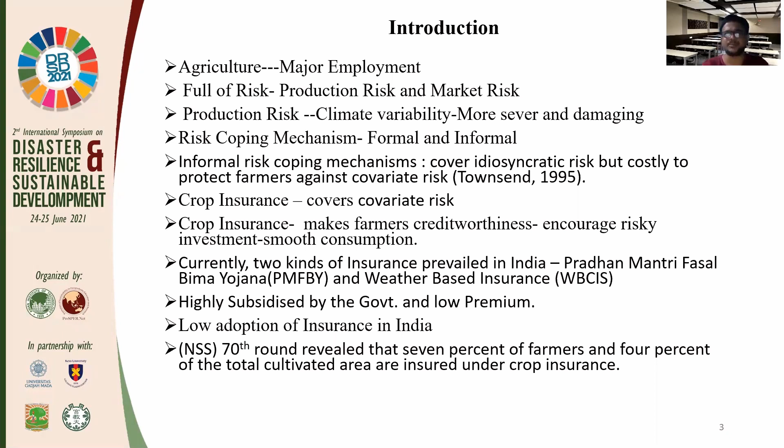Over the decades, a large body of literature explained and inquired about the low adoption of crop insurance. They found different socio-economic, demographic, educational, and structural factors responsible for low adoption. However, these studies lack behavioral anomalies or behavioral economics literature or behavioral biases that influence crop insurance adoption.

So the objective of my research paper is to understand the studies conducted so far in India which inquire about determinants. The second objective of my study is to derive insight from behavioral economics literature on crop insurance adoption for future research in India.

So there are two groups of literature I explored. The first group explained the determinants of crop insurance. The second group explained the behavioral anomaly that could influence farmers' behavior to adopt crop insurance.

The determinants are categorically divided into four groups: economic factor, socio-demographic factor, educational factor, and structural factors. In economic factor, price or premium of the insurance is important. Many studies in India found that price and premium of crop insurance is negatively related. Similarly, liquidity constraint is also a very important factor for adoption; lack of money or liquidity also hinders crop insurance adoption.

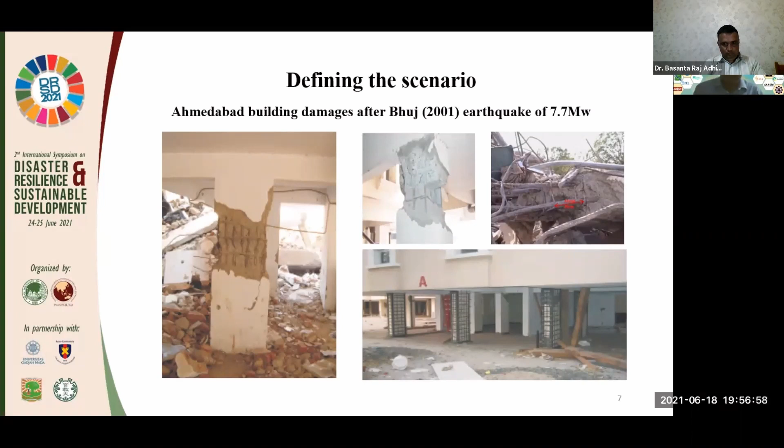Building details: 20-meter length, 16-meter width, 45-meter height, time period 0.9 second in x direction, 1 second in y direction. Story height is 3 meters, soil type is medium, and we have designed as per the 3 codes.

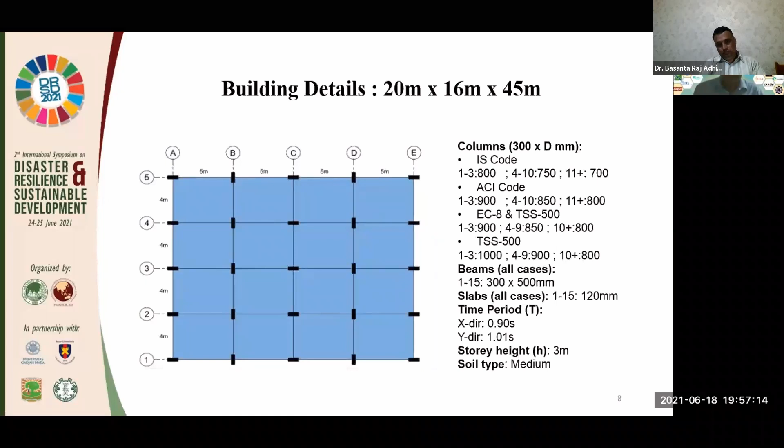The performance evaluation as per the pushover analysis, which is a non-linear procedure. The strength of the building as per IS code is the highest, and the ductility of the building as per the other codes is highest.

Hence we should choose a result in which ductility and strength are both achievable. The performance of the building design as per IS code satisfied the life safety and collapse prevention performance criteria under 3 ranges of the hazard, whereas the life safety performance is not satisfied for the other codes. We need to work more on that.

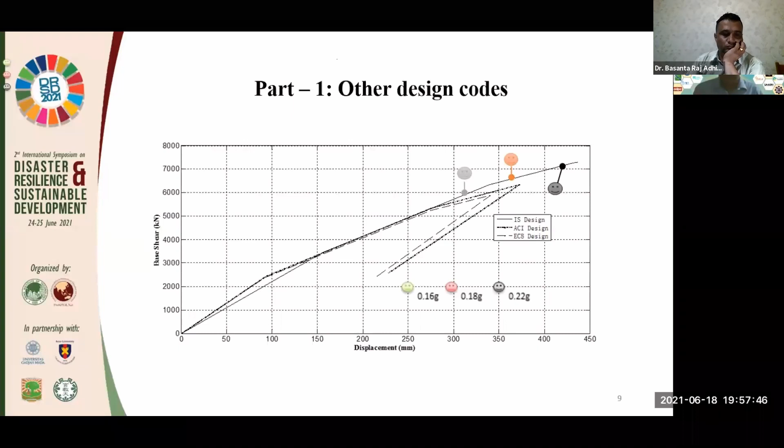When we see the performance of a column at the base level, the strength is high as per IS code, represented by the moment curvature graph, and the ductility is higher for other codes. The percentage of steel varies by 2 times the amount between IS code and other codes, whereas the location of hinges in IS design building is on the upper story. The hinges are seen in the lower story for the other 2 codes.

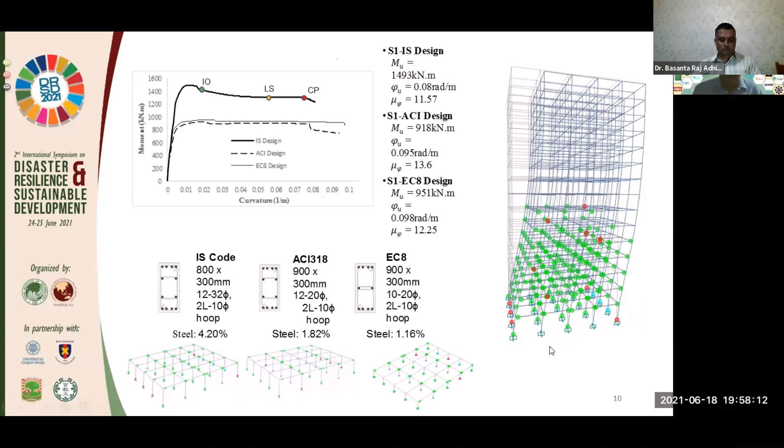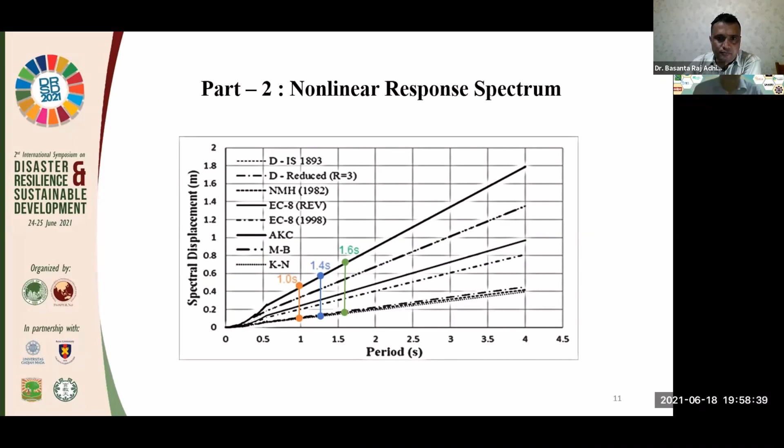That should be followed. The second phase we have evaluated is nonlinear response spectrum. From the graph, we are able to obtain the nonlinear displacement demands for 1 second, 1.4 second, and 1.6 second periods. The displacement demands are obtained for the building. This is important because Ahmedabad city is located at a far distance, and displacement based estimates will govern the serviceability criteria and also the strength criteria, because it is a displacement sensitive region.

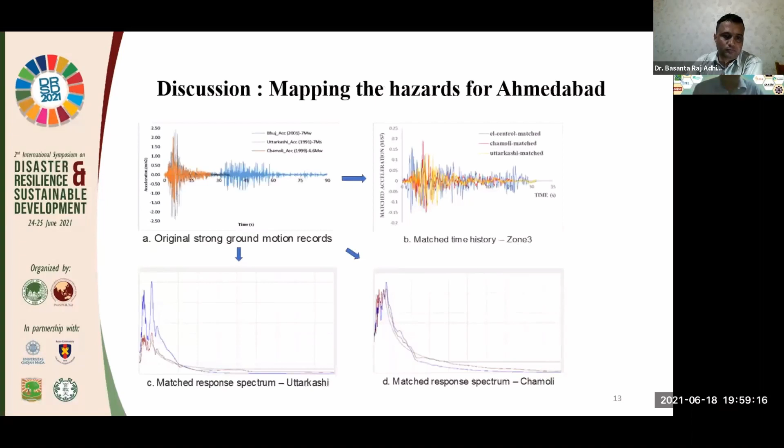Using the feature of ETABS, from the original time history we can obtain a matched time history for our region, or we can get a matched response spectrum. We should use this feature and get more results from this, which will help design high-rise structures in Ahmedabad city.

The pushover analysis procedure showed good results for the building, and the minimum width criteria prescribed by code 13920 is helpful, as the shear capacity and performance of the column gets increased in both directions.

The direct integration method gives a good estimate of the problem. We need a mathematical model and a good dissipation energy model, and these are the two weaknesses in the nonlinear time history analysis, so we should be careful in using them.

The DDBD procedure gave a negative impression of the capacity of the building, as the ductility achieved was only 3, while the assumed value was 5.

From this graph, we can say the IS code is better in terms of the life safety performance criteria and the collapse prevention performance criteria. None of the codes were able to justify the reoccupancy criteria, which is highlighted in the gray area where further research is required.

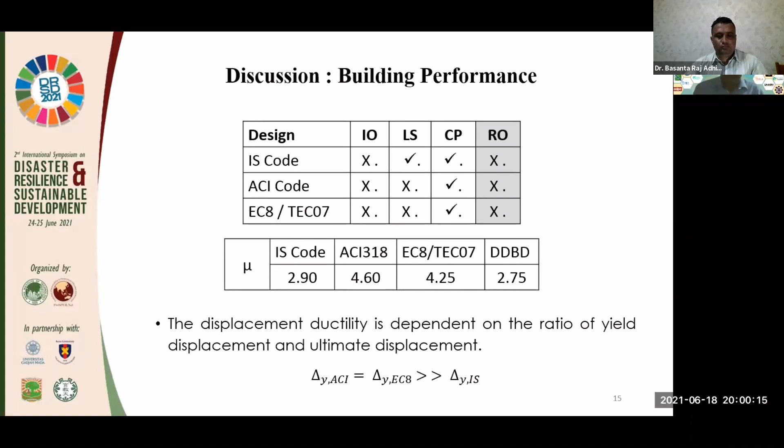The displacement ductility of the IS code is very low compared to other codes and needs to be improved. Finally, the interstory drift we evaluated using a MATLAB program is beneficial to identify the time histories for resilience-based performance-based design, and we can use them for various displacement limits for serviceability and ultimate conditions. That should be the next step for Ahmedabad city.

The current generation of seismic analysis and design must include the locality index, because it represents vulnerability to a larger extent, and building bylaws should govern this. The most stringent rules shall be framed for an earthquake range of 4 to 8 magnitude, and the scenario has to be as per the locality.

So for the Gujarat level and for the India level, this is very important, and we suggest improving the building bylaws, as we need to evaluate the locality indices. Thank you.

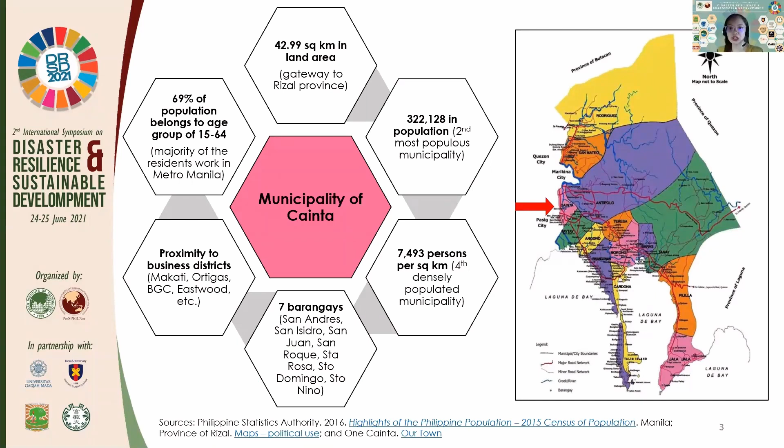Cainta is a first-class municipality of the province of Rizal. As of the 2015 census, it has a population of over 322,000, making it the fourth most densely populated municipality in the country. Cainta has been experiencing rapid growth and development in past years, largely due to its strategic proximity to Metro Manila, the capital of the Philippines.

The study tried to answer the question: is Facebook a viable source of disaster risk information at the local level? The project's main objectives are to study how risk communication is conducted by the LGU of Cainta through Facebook, to determine whether Facebook plays a role in the LGU's risk communication, and to confirm whether usage of Facebook resulted in increased levels of awareness and participation.

The theoretical framework adopted for this study is the NDRRMF. As enshrined in the framework, communities are at the heart of DRRM. It entails going into the grassroots and really interacting and engaging with the community.

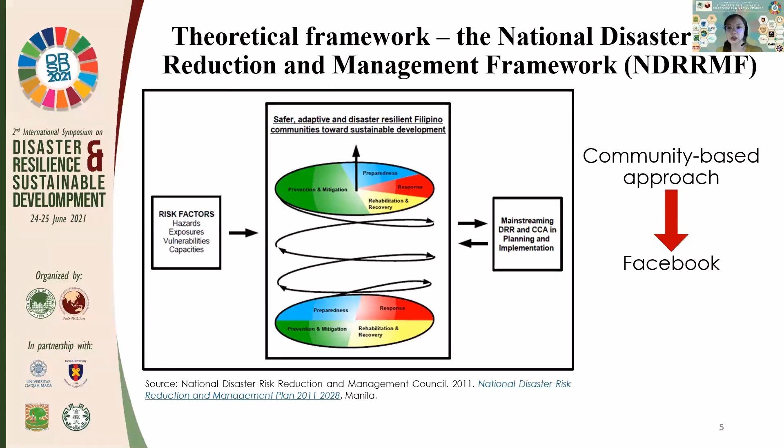This is where Facebook as a tool comes in, enabling a more accessible approach to communication and a two-way dialogue between the LGU and the community, with the capacity to be done in real time.

Based on the community resilience framework of Macaslan, two common denominators can be identified: good governance and an engaged community. The government creates the enabling atmosphere where a community feels empowered to engage.

As an enabling tool, technology such as social media can further foster community engagement by reaching wider networks than traditional media. There are two parts to disaster risk communication: the conveying of timely science-based disaster information to educate and update community members, and community members providing critical disaster-related information from the ground to influence disaster response.

The two parts to this disaster risk communication is what makes it an important aspect of DRRM before, during, and after crisis. The methodology of the study included KII, municipal-wide survey, and desk review.

The LGU of Cainta utilizes Facebook in their risk communication strategy through the mayor's personal account, the One Cainta Facebook page, and the Cainta DRRMO Facebook page.

As of 22 April, the One Cainta Facebook page has over 110,000 followers and over 105,000 likers. The page is the official Facebook page of Cainta and is being managed by the Public Information Officer.

The mayor's personal Facebook account has over 368,000 followers, while the number of friends is not accessible to the public. The Cainta DRRMO has around 4,000 friends, while followers are not indicated on the page.

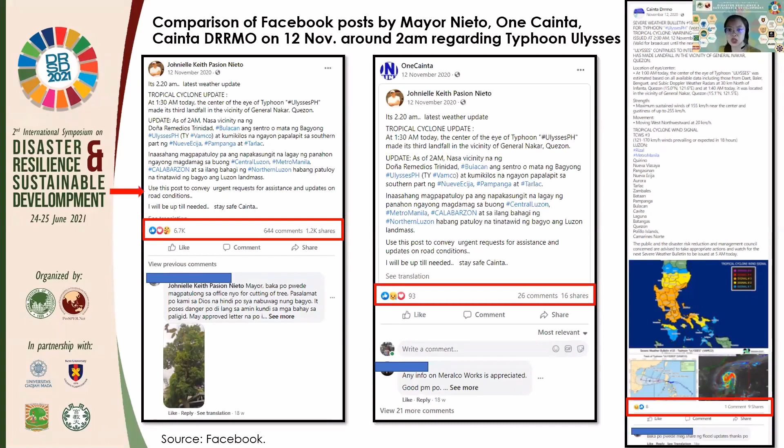Except for the use of graphics, the mayor posted an original post about the typhoon, used Filipino language in the post, explicitly asked people to use the thread for urgent requests for assistance, and out of all three accounts was the only one replying to the comments in the thread.

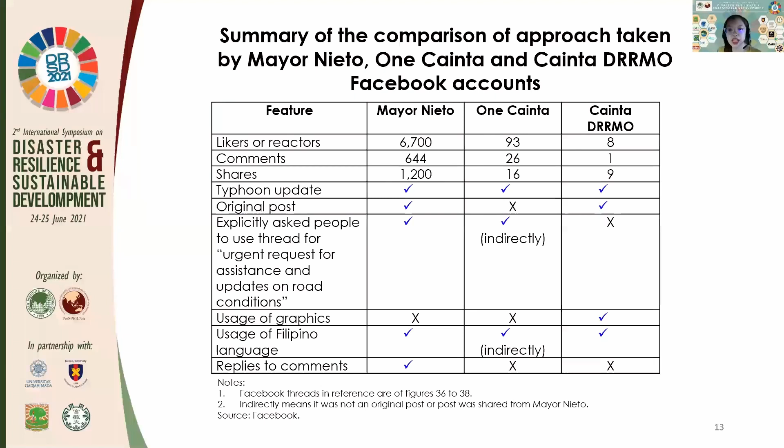This is really the key feature identified and likely the biggest contributor why the post garnered much more likes or reactions, comments, and shares from his followers.

97% of the survey respondents said that Facebook made disaster-related news and information easier within Cainta. Of the respondents who answered no, they cited that there were too many Facebook channels, a lot of mis- and disinformation, they experienced slow response, and poor signal was a problem.

Although 97% agreed for the mayor or the LGU to continue engaging the public in DRRM through Facebook, respondents identified the following improvements: creating information that's complete and easy to understand, posting less informal topics and concentrating on news dissemination, ensuring prompt responses and real-time updates, creating and centralizing one official Facebook page, boosting internet speed, and exploring other platforms.

The community members have used Facebook not just to await news and information, but have been very proactive in seeking disaster-related news and information, such as status of flooded areas and roads, as well as deciding for or against evacuations in the case of Typhoon Ulysses. The study clearly demonstrates the crucial role of Facebook

before, during, and after disaster events, which is aligned to the 4 thematic areas of the NDRRM plan. With more and more people relying on receiving disaster-related news and information through Facebook, coupled with the proactiveness of the LGU in utilizing the platform, it is without a doubt that this has contributed to an increase in the resilience of the residents of Cainta.

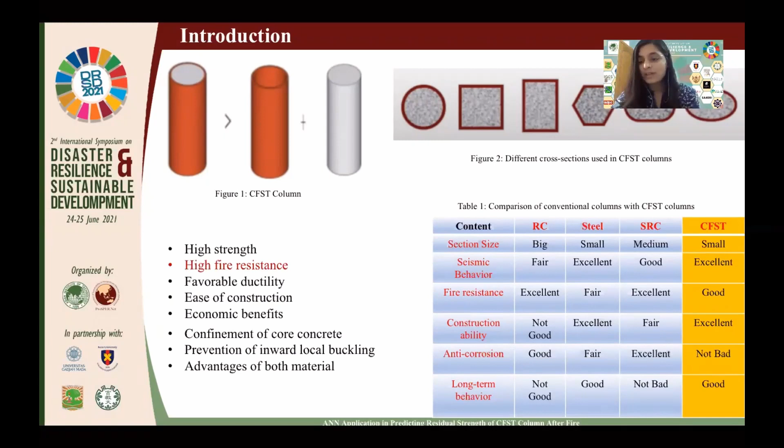So for any construction, it is very important to design it for fire resistance. But if in any case a casualty occurs, then it is very important to know the residual strength of the structure so that retrofitting can easily happen. So this is the main objective of the research: to predict the residual strength of CFST columns after the effect of fire using machine learning tools.

So we have used a machine learning approach to predict the strength here. Artificial neural network tool is used in MATLAB to get the residual values. Here we have used ANN, and it works like the brain's neural learning, for computer-based artificial intelligence.

Because experimental data sets are used, this tool predicts more realistic data for any prediction. ANN also has the ability to overcome the shortcomings of empirical models. And finally, it will be a huge benefit for structural engineers to retrofit damaged buildings.

There are so many fields in structure where AI is used, like structural dynamics, damage assessment, fatigue crack growth, concrete compressive strength prediction, structural analysis, and their design.

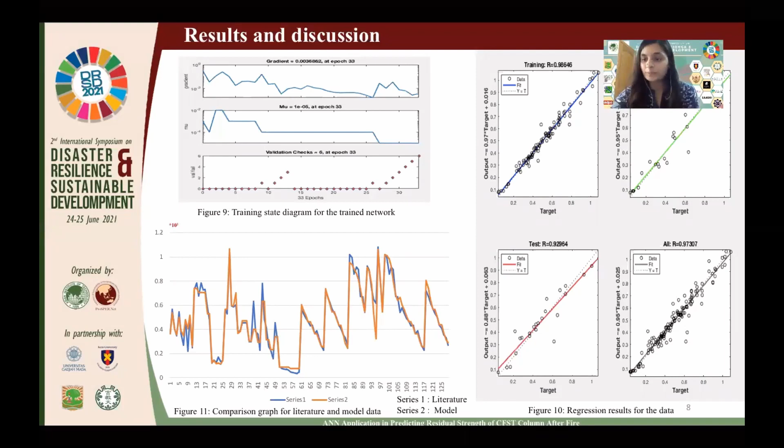So now we can conclude our presentation by saying that cross-sectional area, exposed temperature, and thickness of the encasing steel of CFST columns are the most influential parameters when deciding the residual strength of CFST columns. The network with the best performance has two hidden layers with 18 and 12 neurons respectively. The mean square error and correlation observed are 0.0057 and 0.97 respectively.

The developed model can predict the residual strength of CFST columns with no limitation on interpretation complexity, unlike many design codes. The developed model can also be used for fire safety design purposes to retrofit affected structures, which will benefit structural engineers in a very great way.

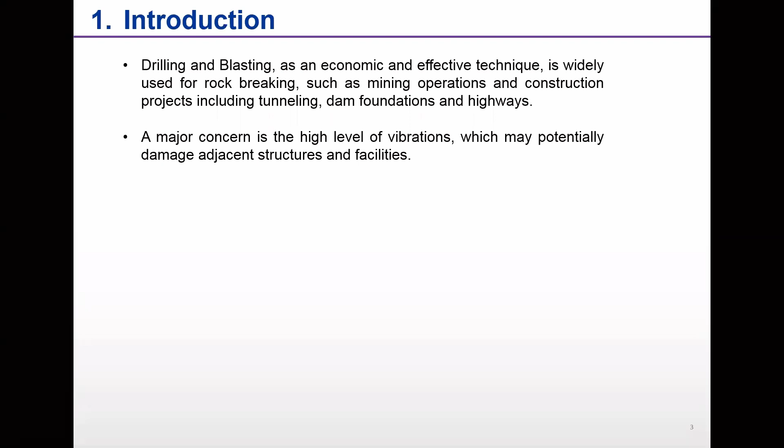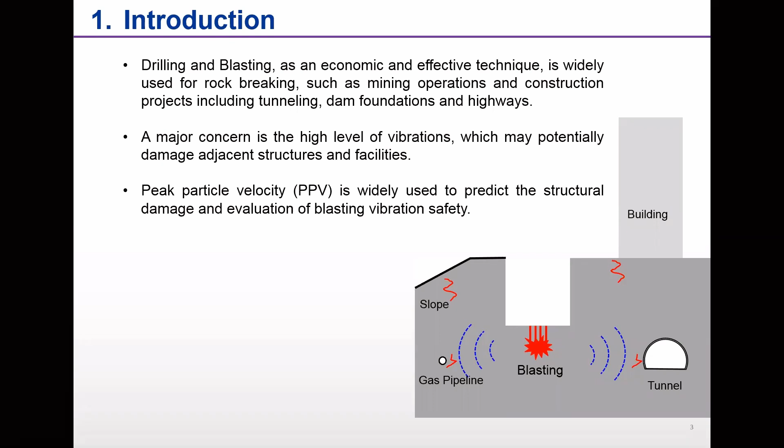Drilling and blasting is an economic and effective technique widely used for breaking rock mass, such as in mining operations and construction projects, including tunneling, dam foundations, slopes, and highways. A major concern is the high level of vibrations, which may potentially damage adjacent structures and facilities like slopes, gas pipelines, buildings, and tunnels. Peak particle velocity is widely used to predict structural damage and evaluate blasting vibration safety.

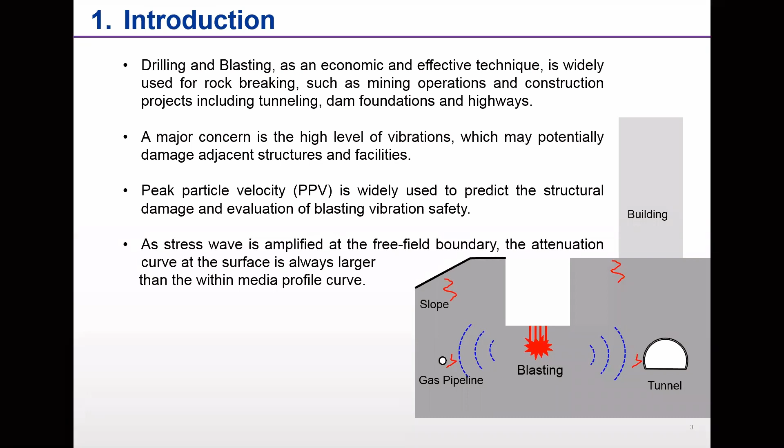As stress wave is amplified at the free field boundary, the attenuation curve at the surface is always larger than within the media profile curve. Empirical correlation is used to find the attenuation curve at the free field surface boundary. Duvall presented the USBM model in 1959, in which peak particle velocity is dependent upon the scaled distance, which is R over under-root W. R is distance, under-root W is the charge weight.

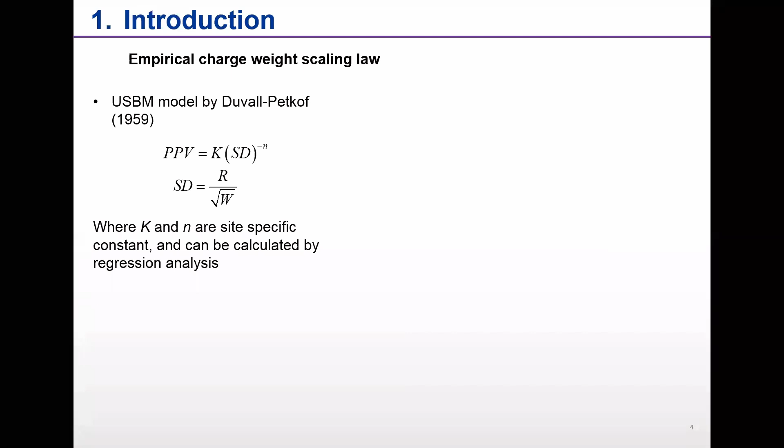If we have field data recorded at surface, we can do a regression analysis on that and fit it. By fitting, we get K and N, which are site-specific constants. Then we can get the within-profile curve by doing a reduction of the surface attenuation curve. The amplification factor depends upon source depth, incidence angle, and Poisson's ratio of the media.

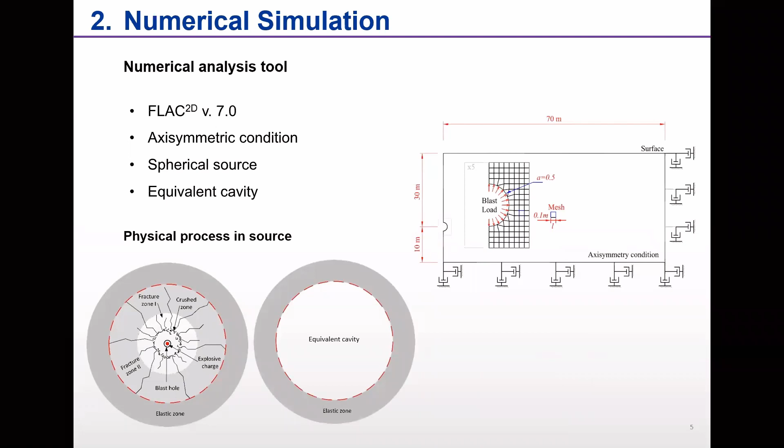Numerical simulation is carried out in FLAC 2D with axisymmetric condition. We have used a spherical blast source with an equivalent cavity. In reality, when a blast detonates around a borehole, a crush zone and fracture zone, which is a non-linear zone, is created. But in FLAC 2D, non-linearity cannot be used, so we have used an equivalent cavity representing the non-linear zone, taken as 0.5 meter radius. After that, blast load is applied on the equivalent cavity of the model.

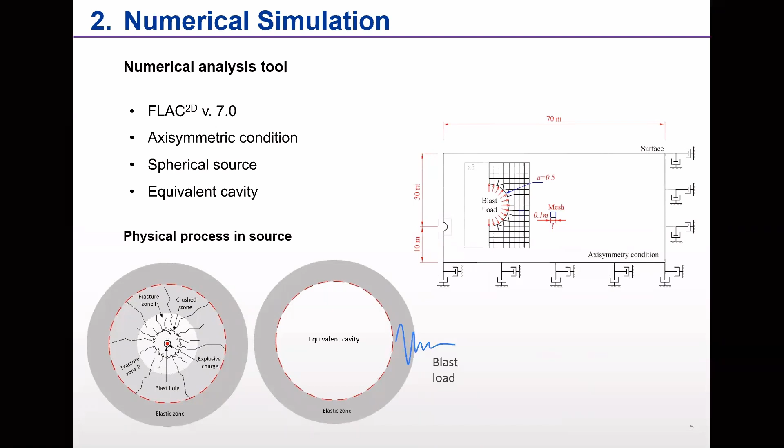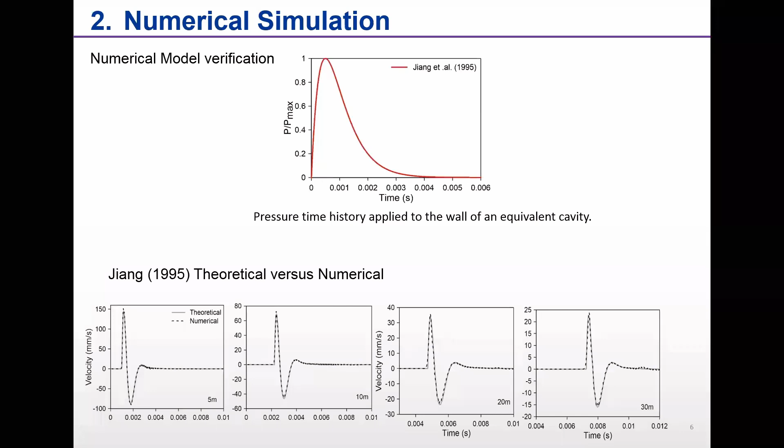Numerical simulation has been verified with the theoretical solution presented by Jiang 1995. The pressure time history is applied to the wall of the cavity in the form of a time history, and we recorded time histories at within-profile points at 5 meter, 10 meter, 20 meter, and 30 meter in the numerical simulation. We can see numerical and theoretical simulation match well, which represents the adequacy of the numerical model.

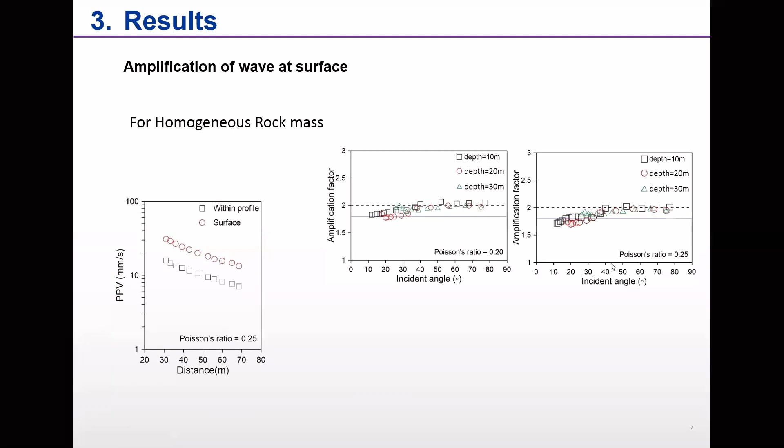By increasing Poisson's ratio from 0.2 to 0.25, we see at lower angle, the amplification factor is going low. And when we take Poisson's ratio as 0.3, again the amplification factor at low angles is low and near to 2 at high angles.

So it is often thought that for homogeneous rock, people use a 2 times amplification factor, but we see from numerical simulation that it is dependent upon the source depth and also based on the Poisson's ratio.

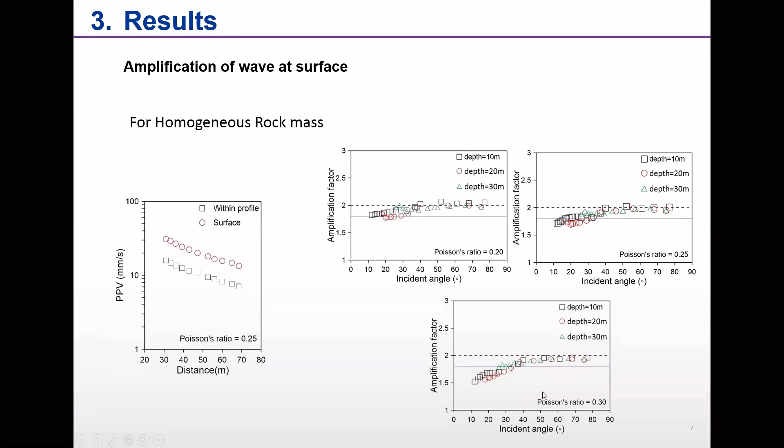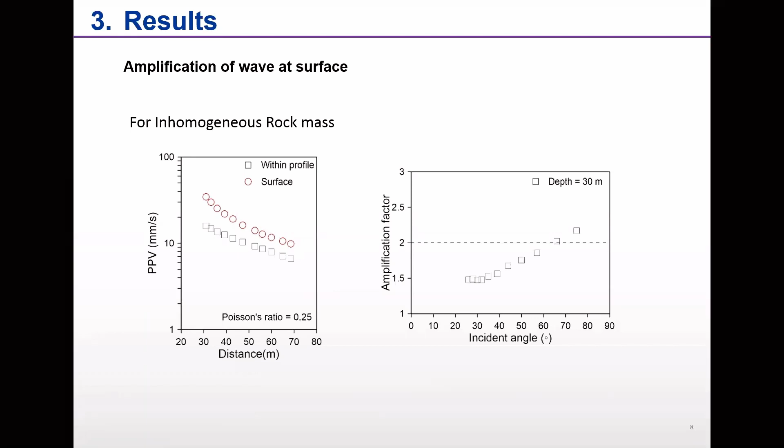So we can say that the amplification factor for a spherical blast source is never the same, but depends upon the rock mass strata, depth of the borehole (blast source), and incidence angle. So numerical simulation is advisable to do if we need the amplification factor.

In conclusion, for uniform homogeneous rock mass, amplification factor increases as source depth increases. For low Poisson's ratio, amplification factor is near to 2. For high Poisson's ratio, amplification factor is first low and then becomes 2 at higher angles. Inhomogeneity of rock mass plays an important role in wave amplification. Amplification factor at low angles is 1.5 and 2.2 at higher angles.

Thank you. Thank you for listening.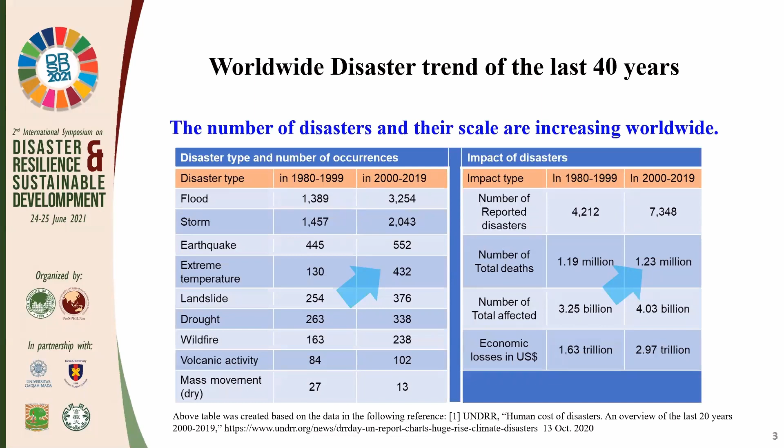In a disaster situation, the access and transport networks may get damaged, and both telephone and internet services may be broken down or disrupted. We need ways to restore the infrastructure quickly, since ICT services play a critical role, especially in disaster situations. To solve this problem, we propose an architecture called Locally Accessible Cloud System, or LACS.

LACS is a portable ICT equipment which includes a server, a Wi-Fi access point, a battery, and other peripherals. In the server, principal ICT functions necessary for handling information among local users are installed. The functions include important notice for broadcasting information, a bulletin board to share information among local people, and chat to communicate among local people on a one-to-one basis.

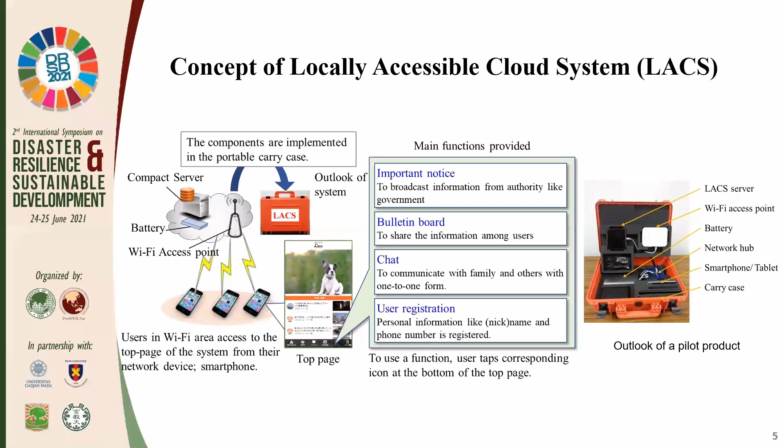In this configuration, in addition to deploying LACS, or local LACS, in a local area, we prepare LACS, or central LACS, in an internet cloud too. The local LACS and the central LACS are operated so that they are synchronized with each other through the internet connection. With this configuration, users in the area can be freed or alleviated from the inconvenience due to the unstable and/or less broadband internet environment.

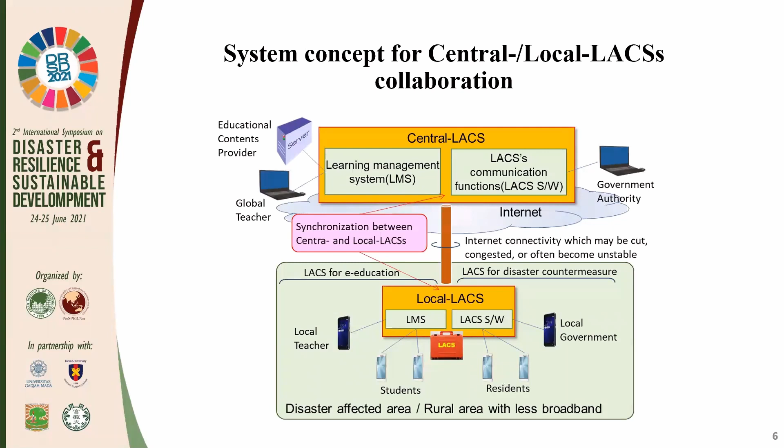We conducted a feasibility study to confirm the effectiveness of the LACS concept in the municipality of Cordova, located near Cebu City in the Philippines. We installed a local LACS server in Cordova's city hall and a Wi-Fi access point to form a local area in and around the hall. The local LACS is also connected to another Wi-Fi access point in an isolated small island called Gilutongan Island, which is 6.5 kilometers away from the hall, through fixed wireless access equipment.

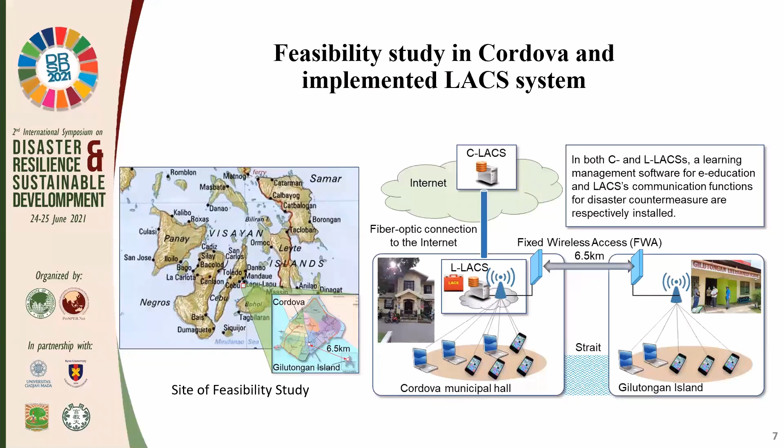The local LACS is also connected to the internet through optical fiber and to the central LACS configured in the internet. In both central and local LACS, a learning management software for e-education and LACS communication functions for disaster countermeasures are respectively installed, and they are synchronized with each other.

Using the deployed LACS system, we conducted the feasibility study as a two-day activity in February 2021. We demonstrated three use cases with the participation of over 10 people, including teachers, students, university professors, local government officials, residents, and others. In the e-education case, a student downloaded educational content and uploaded a report to the LMS in the local LACS; the teacher then accessed the report in the LMS and evaluated it. In the disaster response case, residents used LACS in a simulation of searching for a missing person.

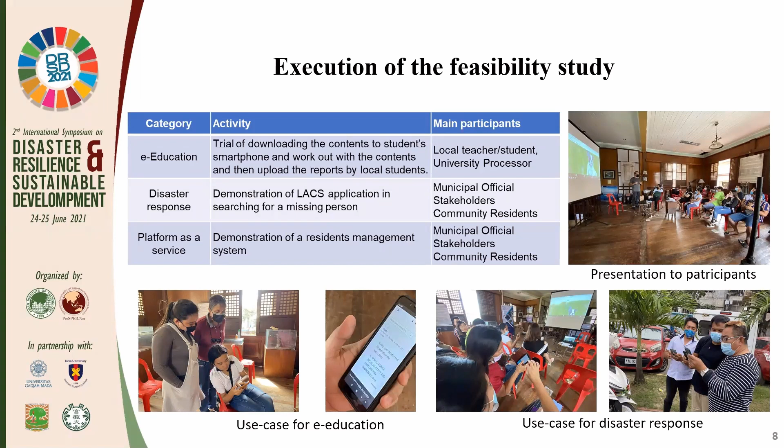We also installed in LACS a residents management software and had local government officials use it for monitoring the status of COVID-19, as a trial for the platform as a service of LACS. The images shown in this slide are shots taken during the feasibility study. At the end of the feasibility study, over 80% of participants evaluated LACS to be very useful in every use case.

Including e-education, disaster response, and resident management. Okay, let me conclude my talk. In my talk, the locally accessible cloud system, or LACS, was introduced as a promising solution to fill the demand-supply gap of ICT in disaster situations, including the COVID-19 pandemic. A feasibility study of LACS was conducted in Cordova, the Philippines, for use cases of e-education, disaster response, and platform as a service. Most participants of the study valued the system as very useful in disaster situations.

We continue the study, especially for e-education, to respond to the real issue under the COVID-19 pandemic. Okay, this is the end of my presentation. Thank you for your kind attention.

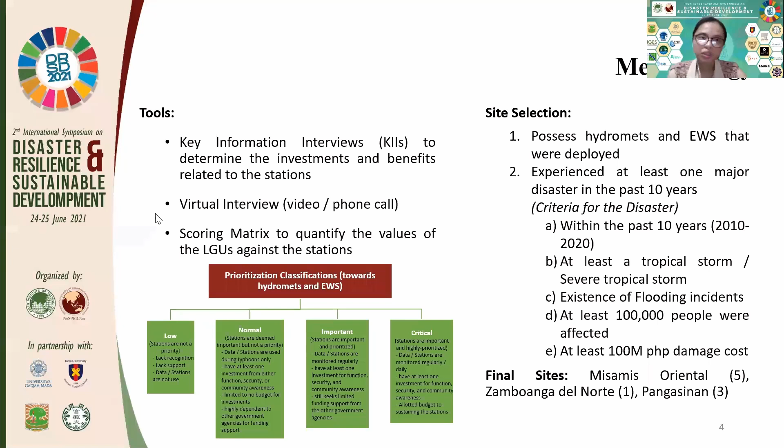Important: stations are prioritized and daily monitored, having at least one investment for function, security, and community awareness of the station. And lastly, critical: stations are highly prioritized, almost the same as the previous category, except that these LGUs allotted budget to sustain the maintenance of the stations in terms of procuring less expensive parts such as batteries and load balancers.

Lingayen and Balingasag have low prioritization, while CDO, Tagoloan, and Siocon viewed their stations as critical equipment. Based on the results, values were affected by several factors.

First, presence during installation. Deployers already introduced these stations to the LGUs during the installation stage. However, the staff from Lingayen and Balingasag just recently assumed their positions as MDRRMOs, hence their lack of knowledge of these stations. Second, perceived usefulness.

Stations are for disaster management and mitigation and were monitored regularly by the majority. But for Lingayen and Sual, areas with limited exposure to flooding only access the data if there's an incoming typhoon.

Perceived ease of use. According to the LGU, websites showing the data from the stations were too technical for public usage, although the officers could navigate the website since majority of them were present in the installation and have prior knowledge. According to the literature,

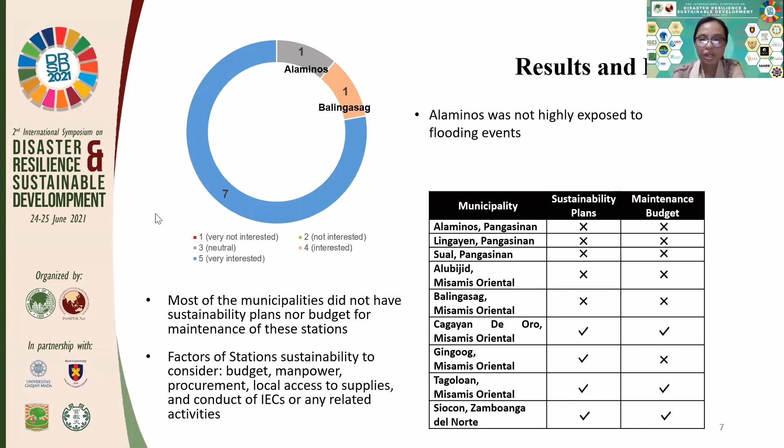In conclusion, values were dependent on the five factors mentioned before. Recommendations: conduct face-to-face interviews with other exposure elements that are affected by flooding events when the pandemic ends, to get the perspective of the whole community in terms of valuing the stations.

This is initially part of my study, but due to the pandemic situation, I had difficulties executing that. IEC and flood drills should be regularly held in small clusters, as well as institutionalizing the need for these stations to emphasize the responsibility of the community, as well as fast-track the processing of sustainability plans, among others.

So that's all, and thanks for listening to my presentation.

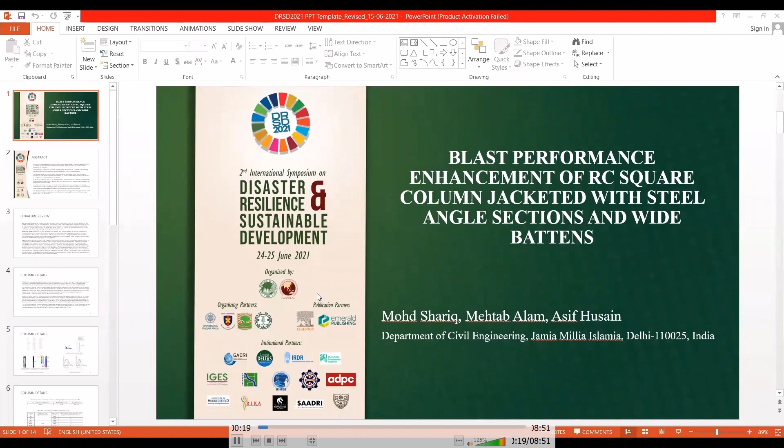As all of us might be well aware, the world has experienced a lot of conflict, like conflict between Armenia and Azerbaijan, and Palestine and Israel. These conflicts are witness to the blast damage of buildings and infrastructures. At the time of blast and explosion, some buildings and infrastructures bear major damages while some collapse completely. Therefore, the structural performance of any building is very important in case of blast and impact loading.

One of the most significant elements in the building structure is the column, which is responsible for bearing the load of the building, and therefore it's very important to investigate and analyze the column under blast loading.

The performance under blast can be improved by enlarging its size using additional steel and concrete, and using different retrofitting techniques as well. However, in this study, a different approach has been followed to enhance the blast performance of seismically detailed axial-loaded square RC columns.

In this model, 4 angle sections have been applied on 4 corners throughout the length of the column, and these steel angle sections are connected with wide batten plates at different locations, like top, bottom, and mid-height region of the column. The aim of the study is to reduce the mid-height displacement and damages. This analysis has been done using the finite element method program Abaqus CAE.

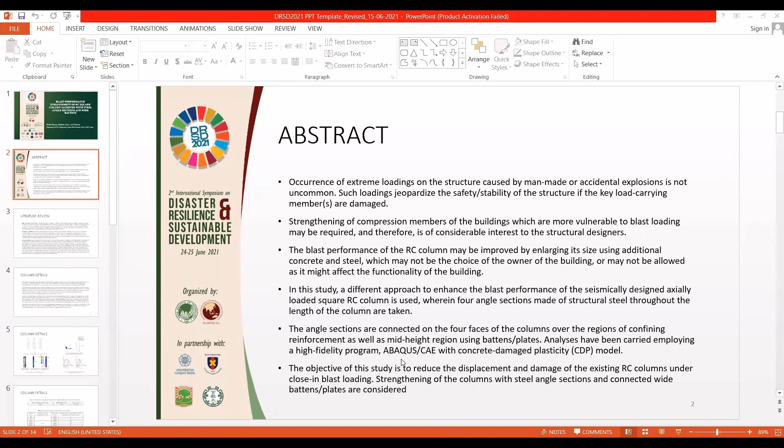Now we are going to the literature review. A lot of researchers have studied this topic in preparing this investigation. Some of them are presented here: Kyei et al., Dong et al., and Hu et al.

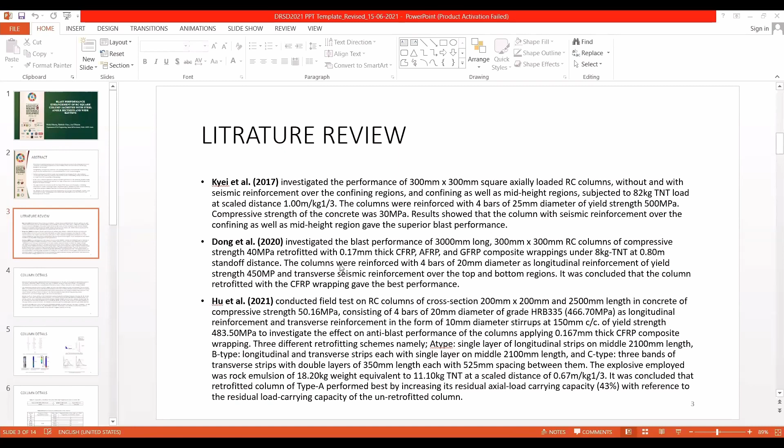The main purpose of these papers is how to increase the blast performance of a column using different retrofitting techniques. Now we go to column details. In this study, blast performance of a 300 by 300 mm cross-section RC column, 3 meters tall, has been investigated. This column carries a load of 950 kilonewton from the top face. Longitudinal reinforcement has been provided as 4 bars of 25 mm diameter, with yield strength of 500 megapascal, and compressive strength of concrete is 30 megapascal.

In this study, we have designed a total of 9 models, as shown in the figure. In this model, lateral reinforcement in the form of 10 mm diameter stirrups has been provided at column 1, with spacing of 150 mm center to center throughout the column.

Further, column 2 is seismically reinforced over a length of 600 mm from each end of the column, and spacing at the middle of the column is 150 mm. Here 75, here 75, and here 150.

At column 3, a seismically confining zone of 600 mm is provided at the top, bottom, and middle of the section, and the rest of the column has a spacing of 150 mm.

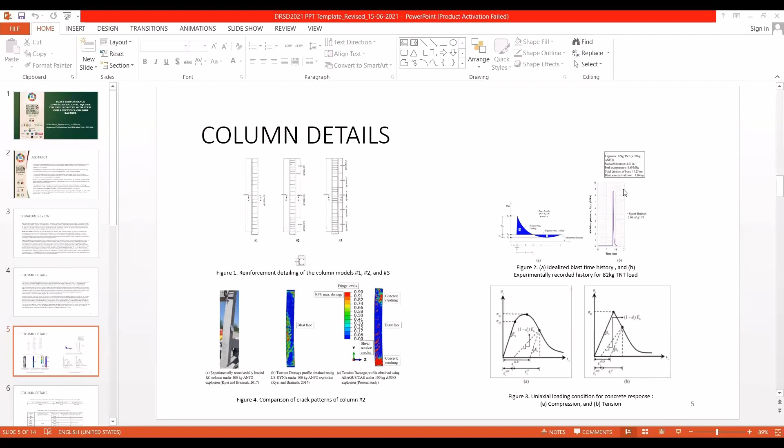Column 2 has been taken as the reference column, shown here. Kyei and Braimah had investigated a 100 kilogram ANFO blast load on the same model and performed analysis using LS-DYNA, concluding the mid-height displacement in their model came out to be 36 mm. However, we studied the same model using Abaqus CAE, and the displacement value came out to be 34.68 mm, with a percentage difference of only 3.67, as shown here.

Now we go to results and discussions. The computed maximum transverse displacement of columns 1, 2, and 3 are 36.13, 34.68, and 31.68 mm respectively, as shown here.

And the damage dissipation energies are 90 joules, 750 joules, and 630 joules, as shown in figure 5, shown here.

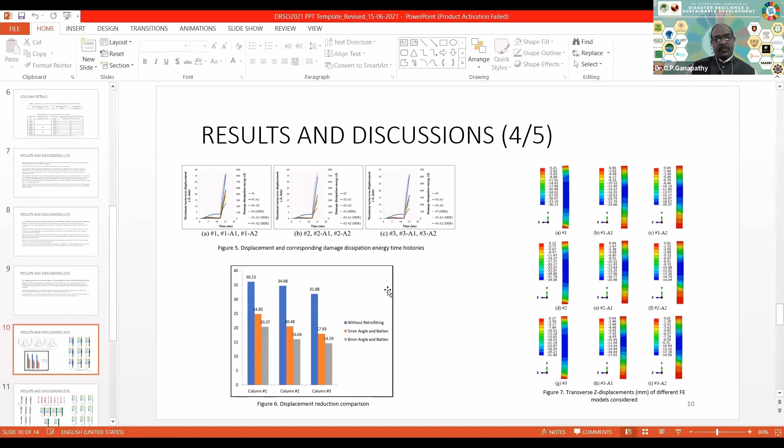This is shown in Table 2. Now the conclusion of the paper. Three major conclusions are shown here.

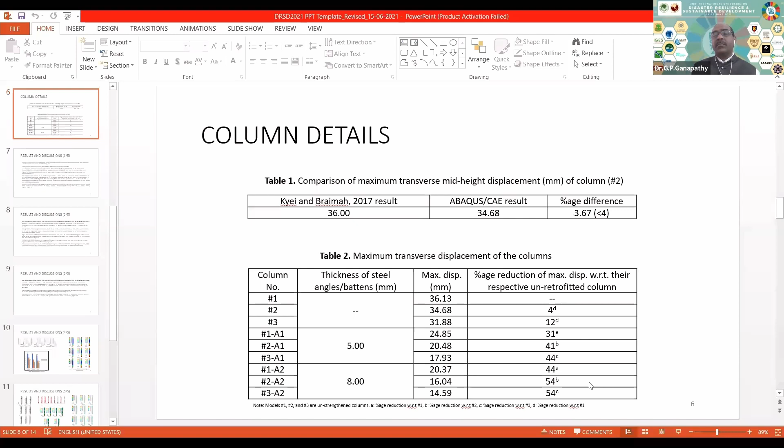Seismic confining lateral reinforcement does contribute in reducing the maximum displacement damages. Second, the proposed strengthening technique enhances the blast performance of the square RC column significantly. And last, higher thickness of the angle section and batten plate are found to be more effective in the case of seismic confining reinforcement.

The end and middle region reduces the maximum displacement but controls the damages more effectively. In conclusion, we have observed that the results were better after strengthening, and further investigation can be done on this model and application. Thank you, sir.

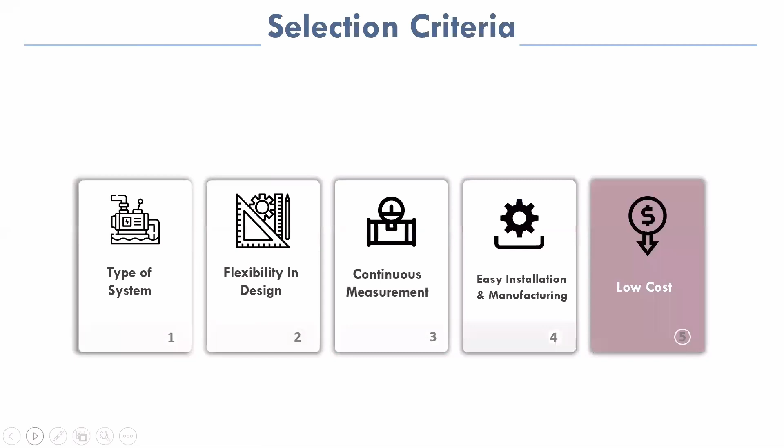So our main objective was to find an effective method to measure flow. We based our device selection on the type of system we required, the flexibility in design, the ability to measure continuously, the easy installation and manufacturing, and of course, a low budget.

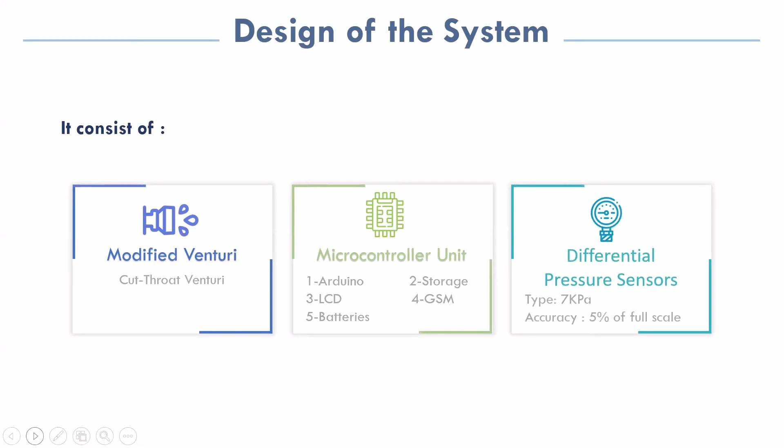As a result, it was agreed that a cut-throat venturimeter was to be used. The venturimeter was used together with differential pressure sensors and a microcontroller unit. These are the dimensions shown in the figure, the dimensions the venturi was manufactured with.

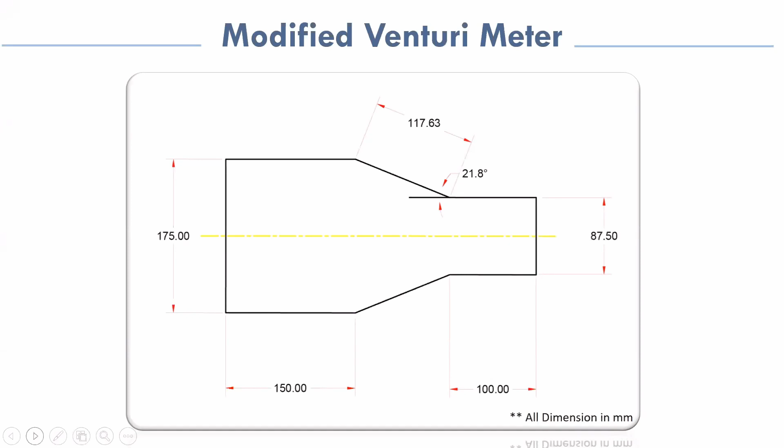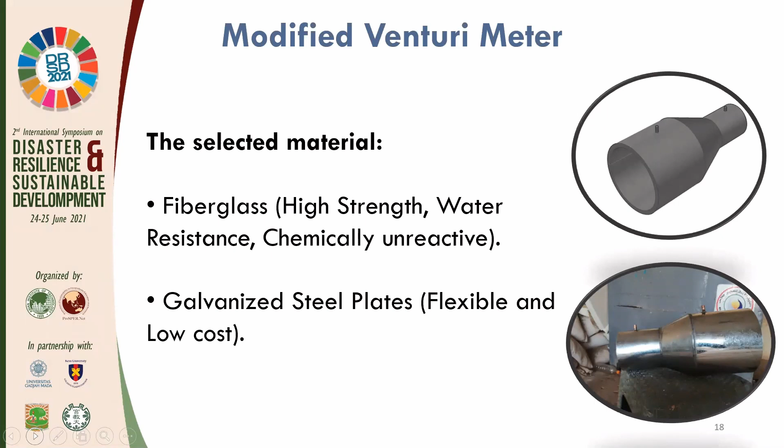Based on the conditions of wastewater, the selected materials used were fiberglass and galvanized steel plates. The microcontroller consists of an Arduino board, which is low cost, has a strong community, and is easy to program.

It also consists of a GSM network shield, a micro SD storage unit, a liquid crystal display screen shield, and batteries used for power supply.

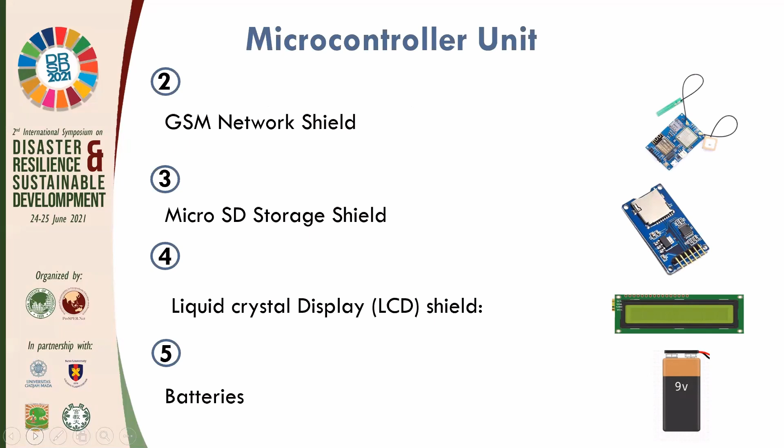The Arduino IDE has special software running on the system that allows you to write the sketches required for programming. The coding language used is similar to C and C++.

As to the differential pressure sensor, it has a sensing element of constant area that responds to changes of forces applied to the known area by fluid pressure. It's calibrated such that the electrical signal has a known relationship to the applied pressure.

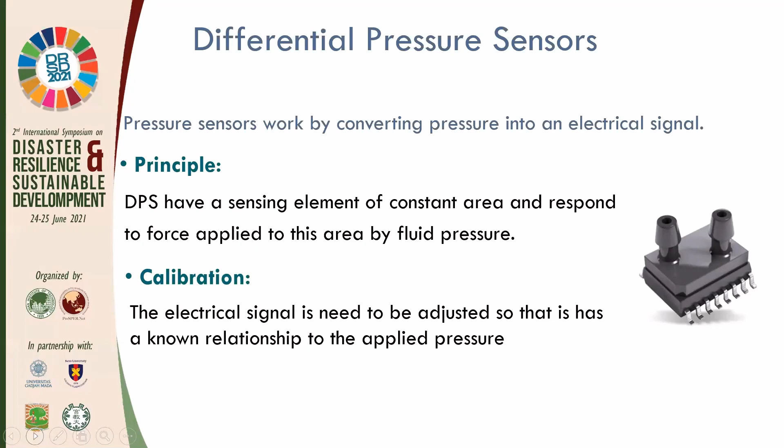We based our differential pressure sensor selection on the magnitude of pressure to be measured. A pressure sensor within the range of -7 to 7 kilopascal was selected, with accuracy equal to 5% of its full scale.

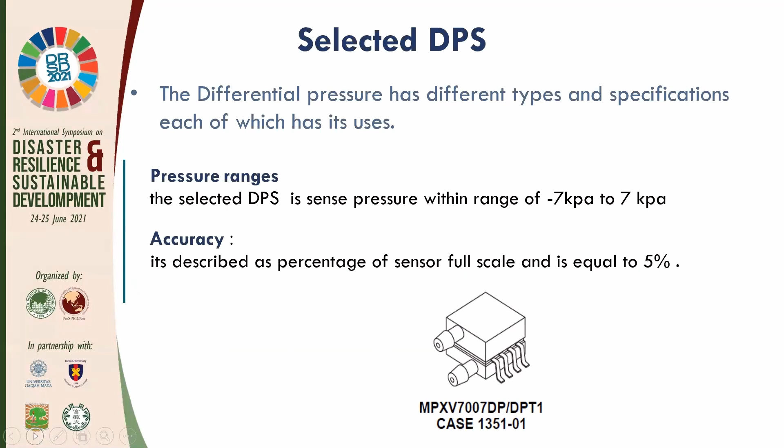The mechanism of the system is that the Venturi creates a differential pressure which is detected by the sensors. The sensors then send the signal to the microcontroller unit. After the signals are converted into readable values by the microcontroller, these values are either uploaded to the cloud using the GSM shield, stored in the micro SD unit, or displayed on the LCD screen.

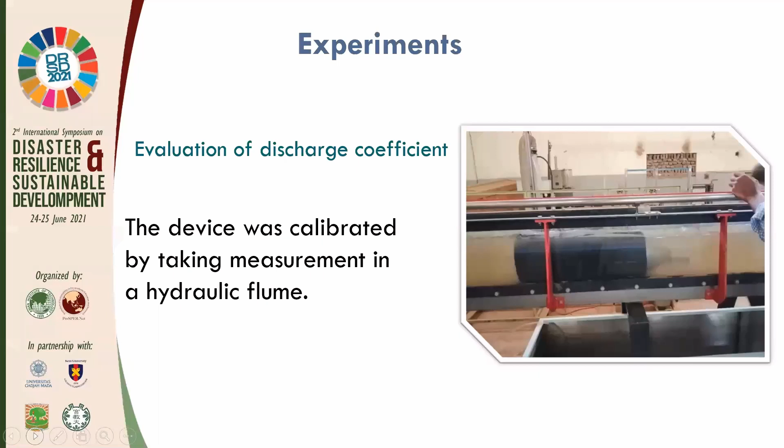Before using the device on an actual manhole, it was calibrated in the lab as shown in the figure.

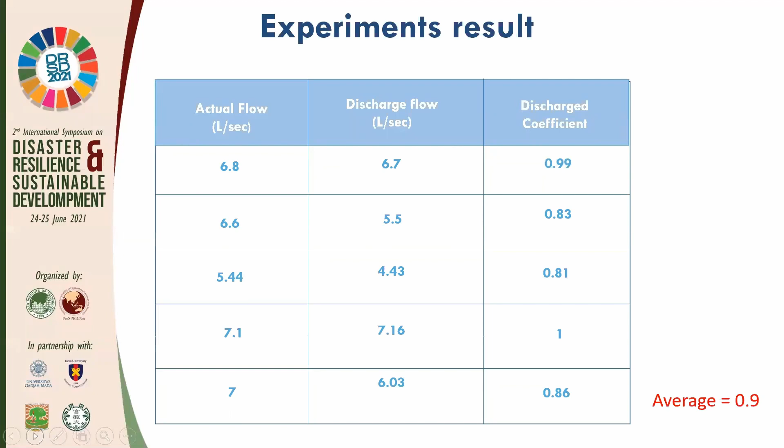The average discharge coefficient from the calibration was found to be 0.9.

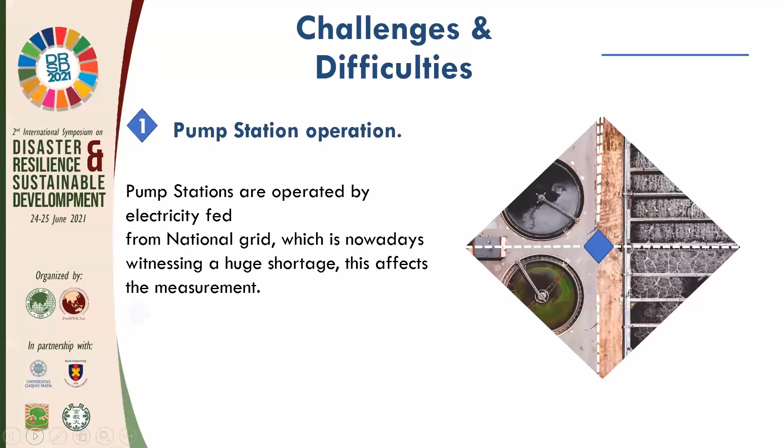We have faced some challenges, such as pump station operation, as electrical cutoffs caused sudden stopping of pump station operation. There were also difficulties in installing the device, because it requires a plunge and it's risky for the worker.

Summarizing all of the above, we were able to manufacture a modified Venturi and verify that our network indeed needs more advanced and exact measurement. We were also able to determine the precision of our Venturi, which had a discharge coefficient of 0.9.

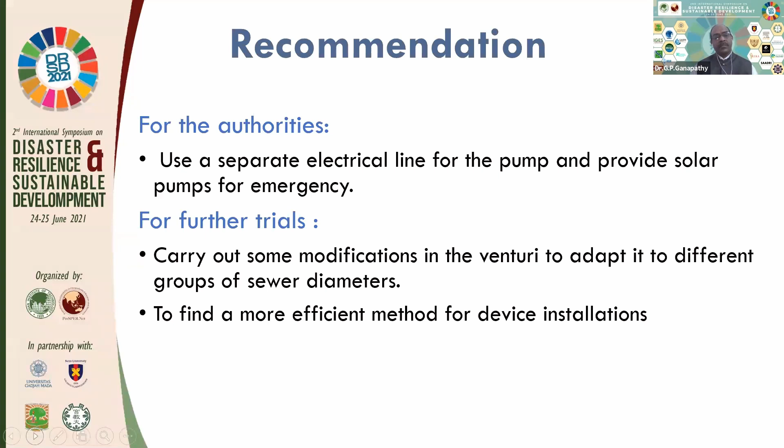As to our recommendations, we recommend the authorities of our country to use a separate electrical line for the pump and provide solar pumps for emergencies. We also recommend future trials carry out more modifications to our Venturi in order for it to fit different groups of sewer diameters. We also recommend finding a more efficient method for device installation with less health risks for workers.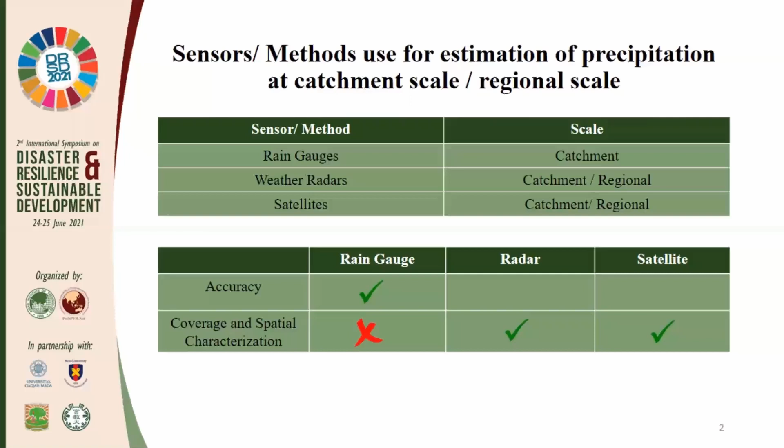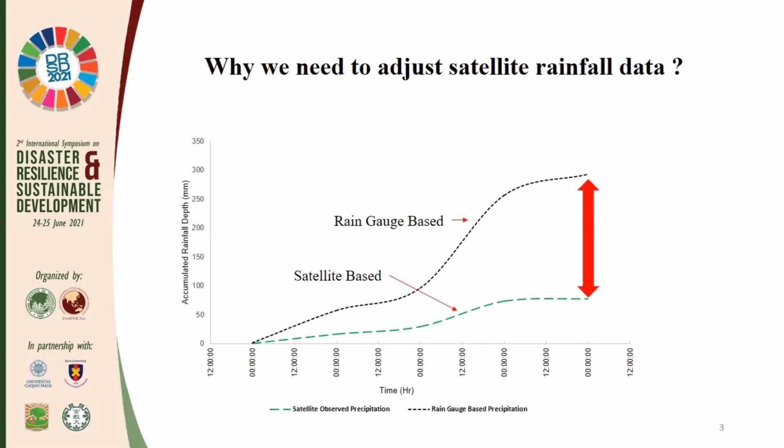This is a quick example of why we want to adjust the satellite precipitation. In this graph, you can clearly see the rainfall accumulation of rain gauges and satellite precipitation in the Kelani River Basin, and a large difference between the two estimates. Therefore, we really need to adjust satellite precipitation before using this data for hydrological applications.

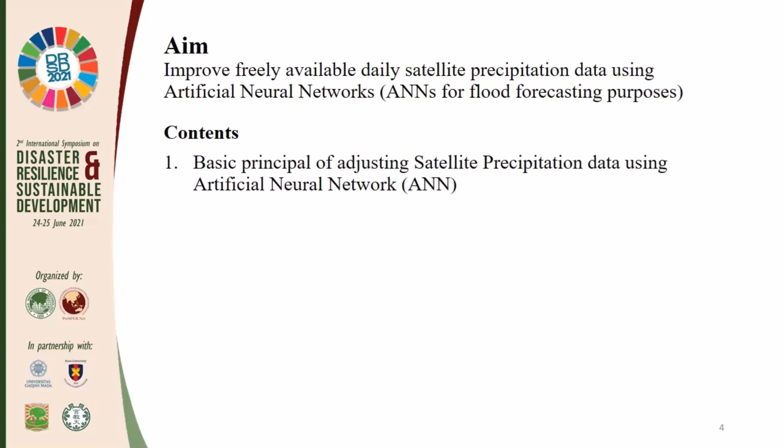The main aim of this study is to improve freely available daily satellite precipitation data using artificial neural networks. The contents covered in this presentation are as follows: first, explain the basic principles of adjusting satellite precipitation data using artificial neural networks; afterward, the case study used to adjust the rainfall data is presented.

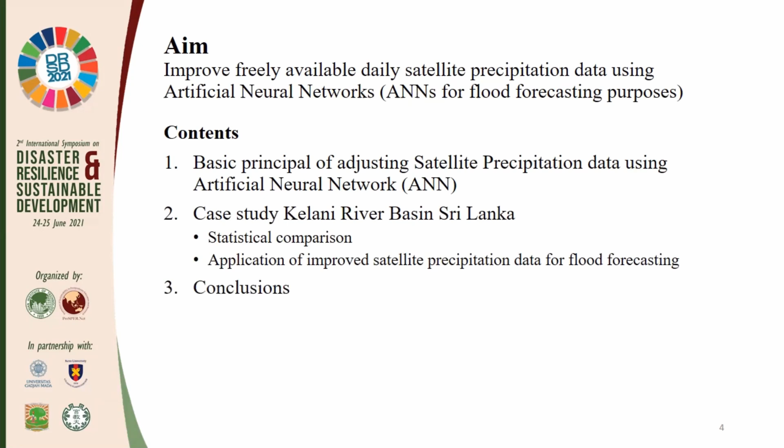Under that, the statistical comparison and the applications of the improved satellite precipitation data for flood forecasting are also presented. Then lastly, we briefly mention the conclusions.

According to the comprehensive literature review we carried out, we can establish a nonlinear relationship between satellite precipitation and gauge-based precipitation. To establish this nonlinear relationship, we use a three-layer neural network, with satellite precipitation as the main input layer and gauge-based precipitation as the output layer.

To better fit the data, we increased the number of hidden layers up to 100. The fitting was conducted with a feed-forward neural network system, and the transfer function used was sigmoidal. Further to that, we used 70% of the data for training and developing the algorithm, and 30% of the data for both validation and testing.

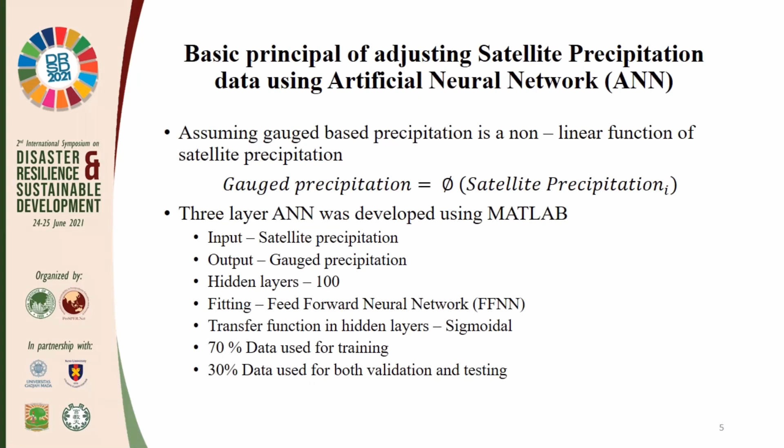Now we can focus on the case study which we used to test these algorithms. The Kelani River Basin is Sri Lanka's second largest river basin, covering an area of 2,230 square kilometers. The basin can be distinctly categorized into two parts, upper and lower, depending on the terrain profile. The area above the Hanwella gauge is considered the upper basin, whereas the other is the lower basin.

During floods, the lower reach is severely flooded. However, there is a well-maintained rain gauge network. But we wanted to check the applicability of improved satellite precipitation data in this river basin, because this was found as a research gap during our literature survey.

In this project, we used the following data: gauge precipitation with daily temporal resolution, and Tropical Rainfall Measuring Mission satellite precipitation with daily temporal resolution. Testing was conducted for severe flood events that happened from 2010 to 2020. In modeling with the HEC-HMS hydrological model, we also used some basin parameters.

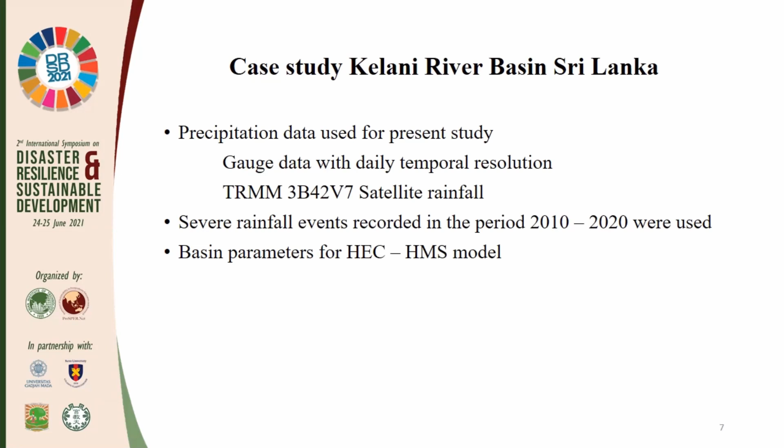After developing the ANN-based algorithms, we were able to get the results shown in these figures. Here you can see the original TRMM data in blue bars is much lower than the actual precipitation, denoted in brown color. Once we trained the satellite precipitation, we were able to derive improved satellite precipitation for many cases, such as 2017, 2011 and 2018.

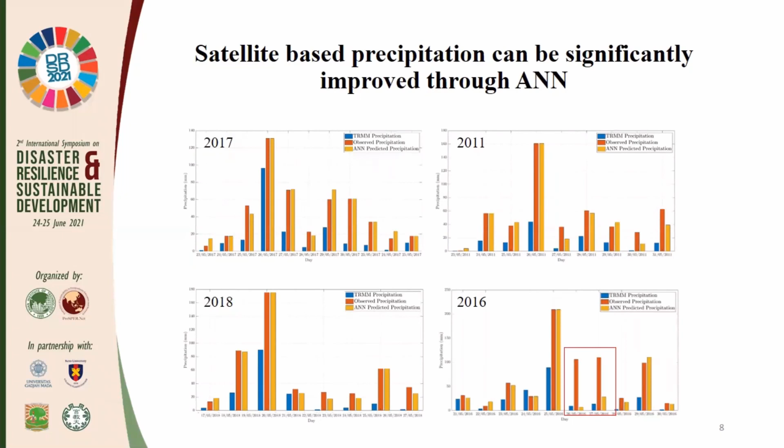However, in 2016, this developed ANN algorithm was unable to well capture the actual precipitation, as that was an extreme event with the influence of a cyclone.

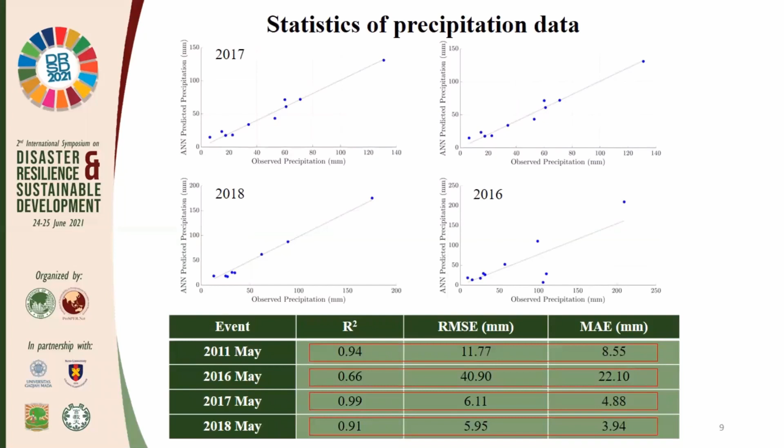Let's check the applicability of the improved satellite precipitation for simulating flood flows. We developed an event-based hydrological model using HEC-HMS, calibrated and validated with actual precipitation. Then we used the improved satellite precipitation to simulate the floods.

Many cases were correctly replicated with the improved satellite precipitation. However, in 2016 the event was not well captured, and the flood volume, peak, and everything was poorly captured, as that was an extreme event.

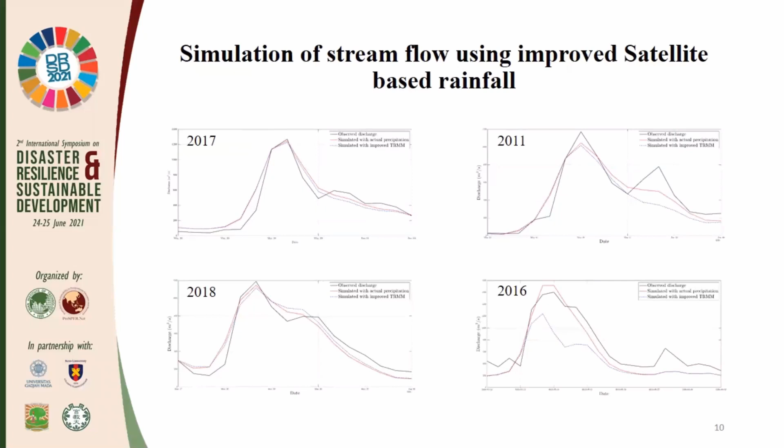Further, we conducted a statistical analysis to check the model's performance. You can clearly see the flows generated by the improved satellite precipitation were able to capture the flow process correctly. However, for 2016 it is much deviated.

Some conclusions from our research work are as follows. Gauge-based precipitation adjustments are implemented to improve satellite precipitation and overcome its shortcomings. Artificial neural networks can be used to improve daily satellite-based precipitation. Improved satellite-based precipitation can be used to simulate floods using the HEC-HMS hydrological model. However, the prediction capability for extreme events is still questionable.

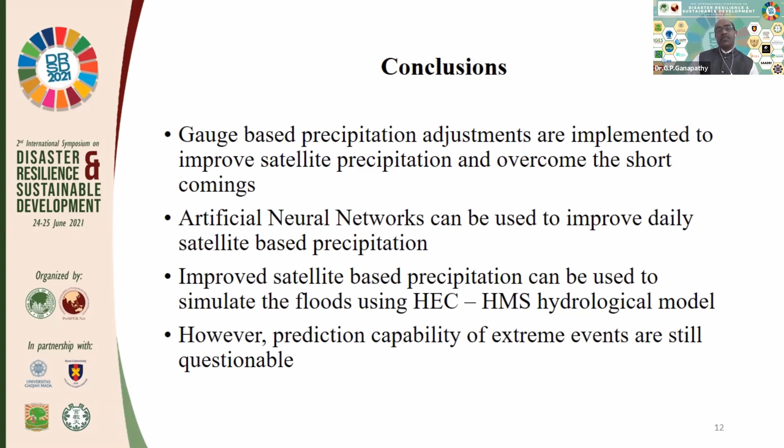Thank you, Ms. Janka Tanuka, that's a nice presentation, and it's a very useful presentation particularly for developing the early warning system. There will always be a difference between satellite-based models and gauge stations. The accuracy of the data also differs from place to place depending upon the pixel size. So it's a very, very nice study, thank you.